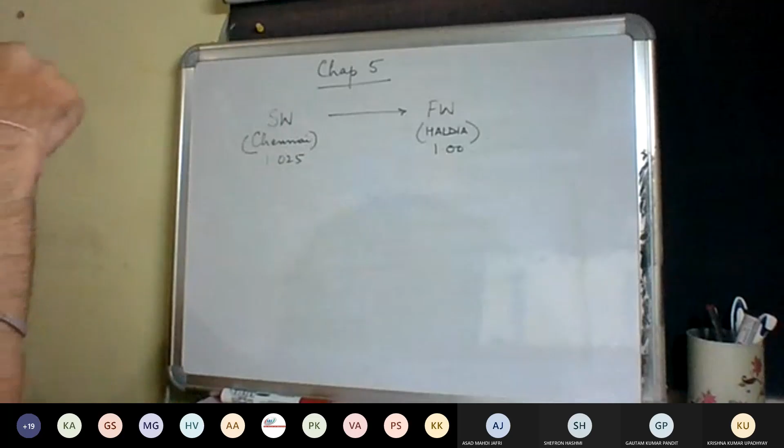So I am going from a higher density to a lower density. So what will happen to my hydrostatic draft? Anybody? So the draft will increase. Draft will increase, sir. So my draft will increase.

So I will have what is called as a mean sinkage. My draft will increase.

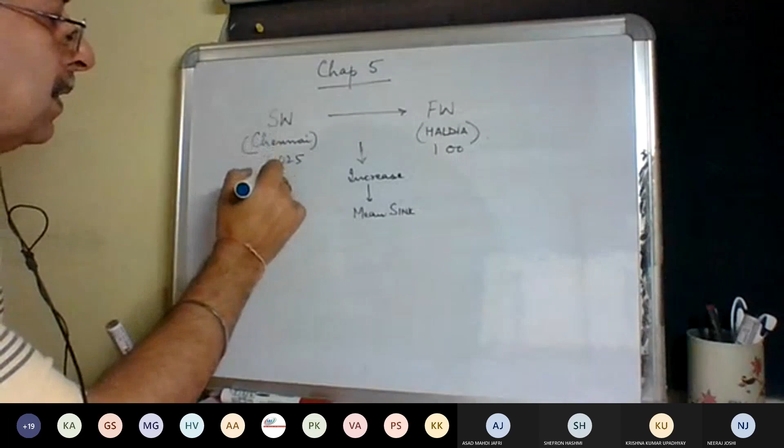Now, for the first part of it, supposing at Chennai, my vessel's displacement was 50,000 tons. And I pick up the ship and I put it at Haldia now. What will be my displacement here, at Haldia?

Displacement will remain the same. Does everybody agree to this statement? Yes sir, displacement remains constant. Displacement does not change. What changes is the underwater volume and therefore the draft. The displacement remains constant. Okay, the underwater volume will change. Draft will change. Displacement remains constant. Okay.

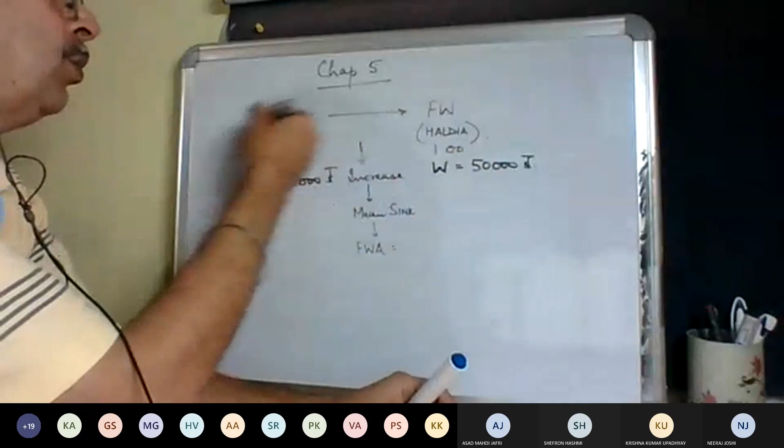Now, if I am moving from salt water to fresh water, the change in draft, this is called as freshwater allowance. The increase in draft is given by the term freshwater allowance. Similarly, when I go from freshwater to salt water, the decrease in draft is called as freshwater allowance.

And this freshwater allowance is given by a formula: W upon 40 TPC, where W is the displacement of the vessel, TPC is the tons per centimeter immersion. Let's check the units. W is in tons, TPC is tons per centimeter. Tons cancel, centimeter goes on top. So the units of freshwater allowance, when you use this formula, will be centimeters.

So freshwater allowance is this.

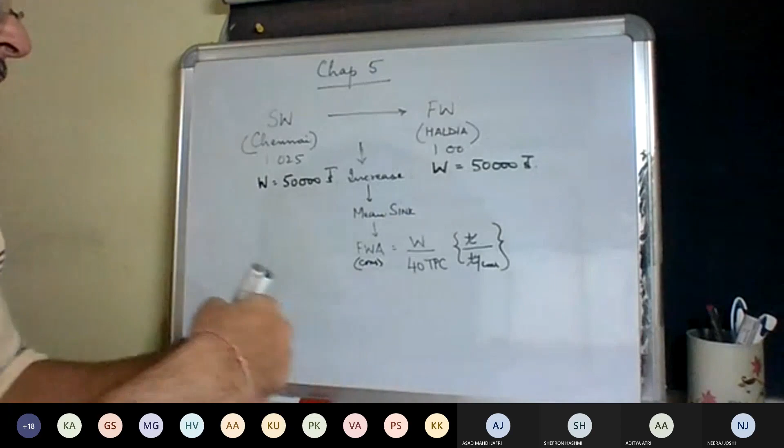Now there is something called as TPC. TPC changes with density.

So therefore, the TPC which will be used for calculating, and the freshwater allowance is also directly proportional to displacement. That means as my displacement keeps increasing, the freshwater allowance will also keep increasing along with the draft, because displacement will be proportional to the draft.

Proportional means it'll increase with the draft, not at the same rate. So that means if draft increases, freshwater allowance also increases. So therefore, the freshwater allowance usually given for a ship is at the summer draft.

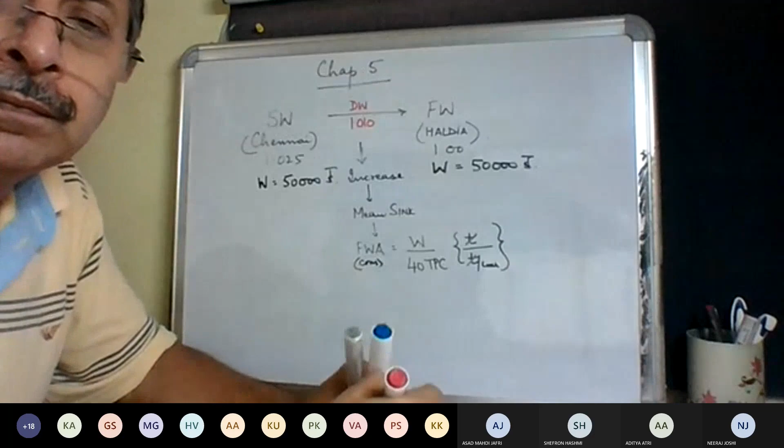Now there is something called as a density in between freshwater and saltwater. So supposing I am talking about a density 1010, that will be called as dock water. So dock water is a density in between saltwater and freshwater.

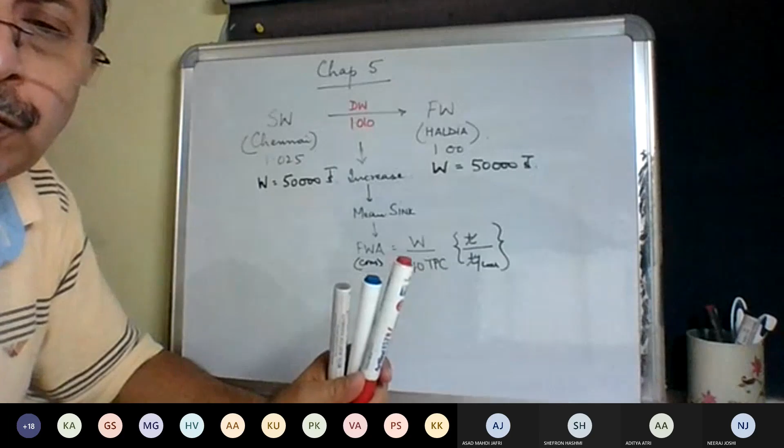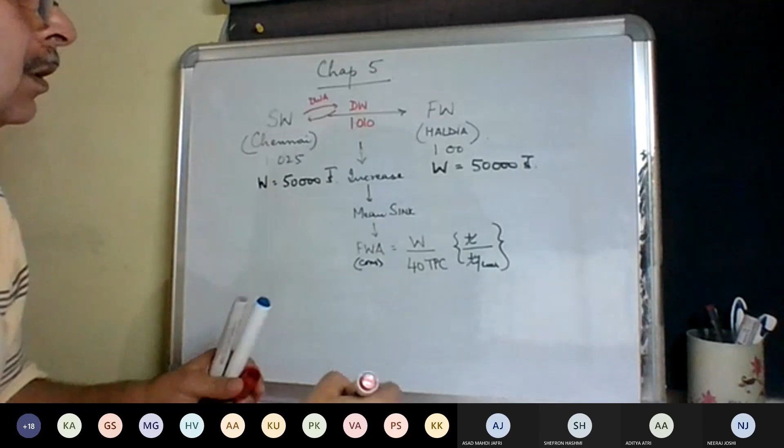So when the vessel goes from Chennai to dock water, then that will be called as dock water allowance. Similarly, reverse. And if the vessel goes from Chennai to Haldia, freshwater, then it is called as freshwater allowance.

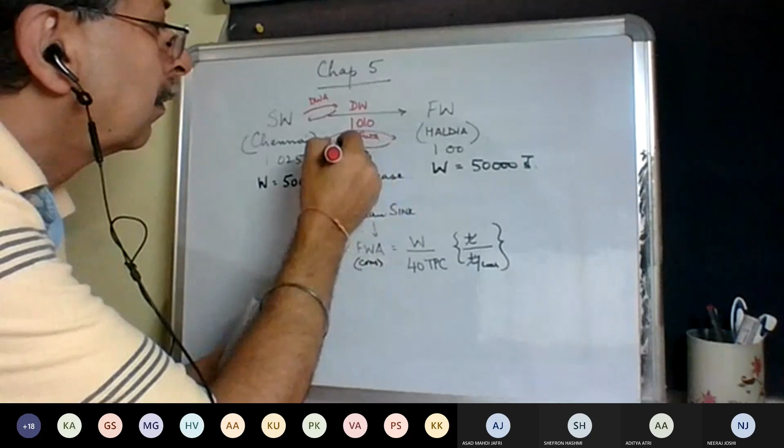The methodology will remain the same. That is, when I'm going from higher density to lower density, there will be an increase. And if I'm going from 1010 to 1025, there will be a decrease.

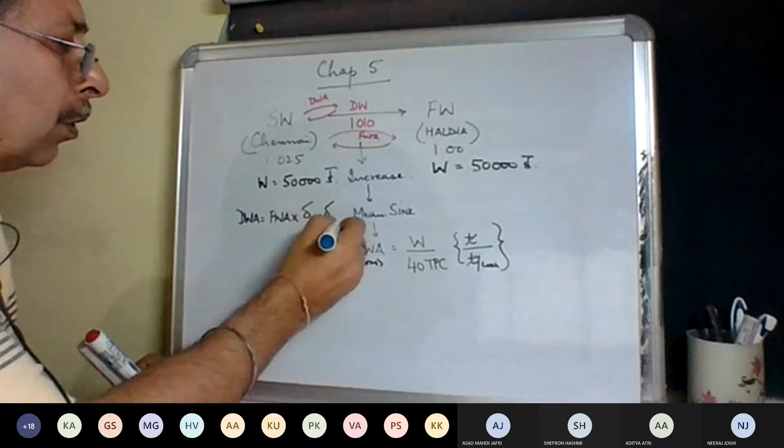The formula for dock water allowance is freshwater allowance into difference of the two densities upon 0.025. Freshwater allowance into difference of the two densities upon 0.025. This will give me dock water allowance.

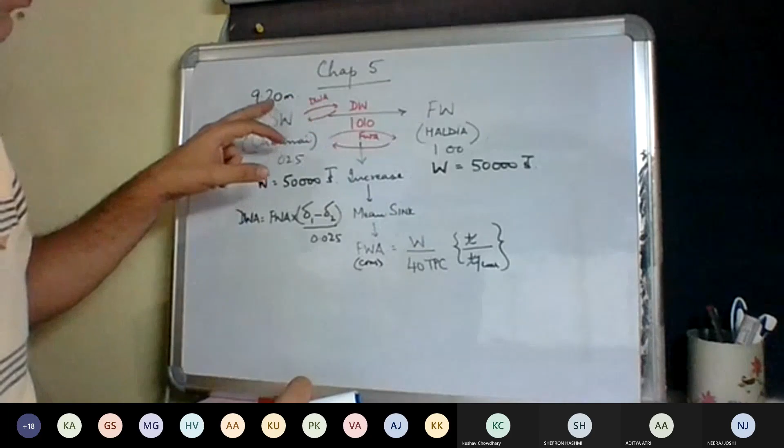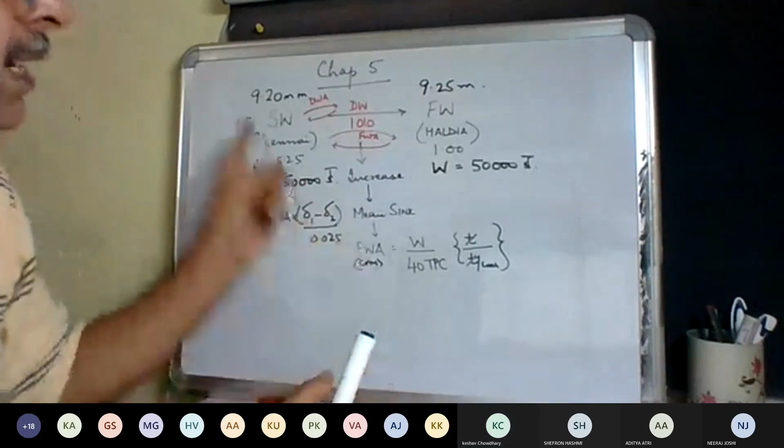Change in underwater volume. Change in underwater volume, and basically because of change of density it has happened. Yes, sir. So that difference of 5 centimeter is what is called as freshwater allowance or dockwater allowance, depending on what be the case.

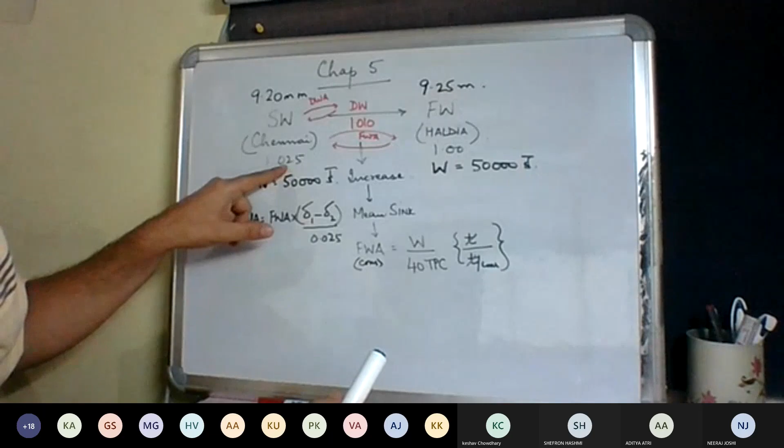Okay. Because buoyancy is decreasing. This was earlier providing me greater buoyancy, greater upward force at Chennai. But when I arrive at Haldia, density has decreased. So therefore, the buoyancy has decreased. If buoyancy has decreased, the vessel will sink because displacement is the constant.

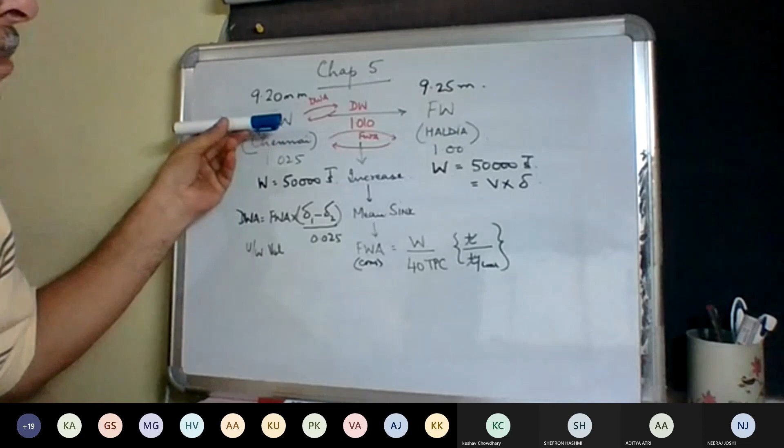Second is draft remains constant. So if my vessel is floating at 9.20 meter draft in salt water, I want to keep my draft the same 9.20 over here in freshwater also. How will that be possible?

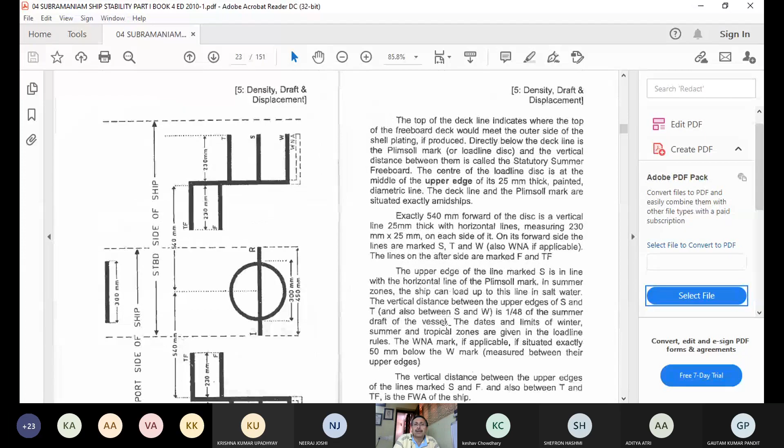All right, so therefore, let me show you the starboard side. So this is the starboard side one.

The deck line is 300 mm. The plimsoll mark, which is in line with the summer mark, is 25 mm thick. The OD is 300 mm diameter, and the length of the line is 450 mm. The center of the plimsoll mark to the center line of the starboard side load line vertical line, the distance is 540 mm.

Each of the lengths of the tropical fresh and the tropical are 230 mm in length. So it starts with tropical fresh, then you have fresh, then you have tropical, then you have summer, and then you have winter. And below the winter, you have winter North Atlantic, only specific for the length of the vessel and for the region where it is plying.

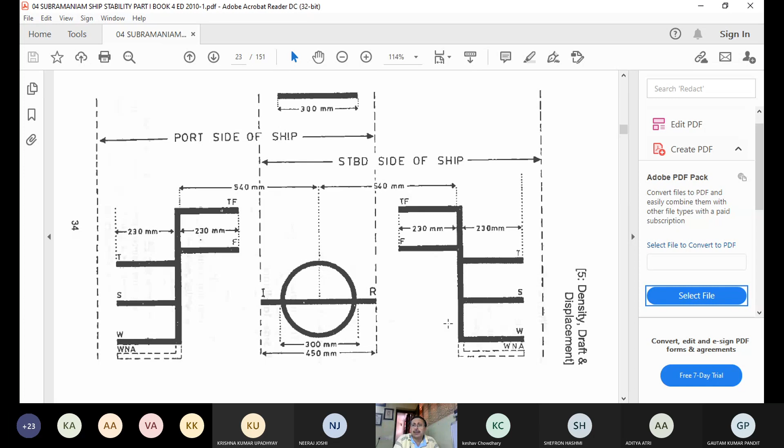Okay, these load lines are weather-wise. So the world has been divided into summer zone, tropical zone, tropical fresh, winter, and winter North Atlantic. This has been done for the safety of the vessels. So the vessel which is in a particular zone, that load line should not be submerged.

That means if I am in a summer zone, my summer zone mark should not be submerged. Similarly, if I'm sailing out in a tropical zone, then the tropical zone load line should not be submerged. At any point of time, no load line should be submerged. That is the important thing.

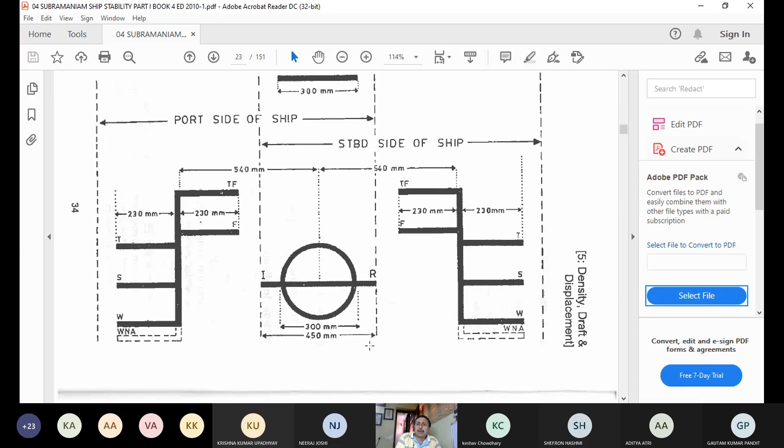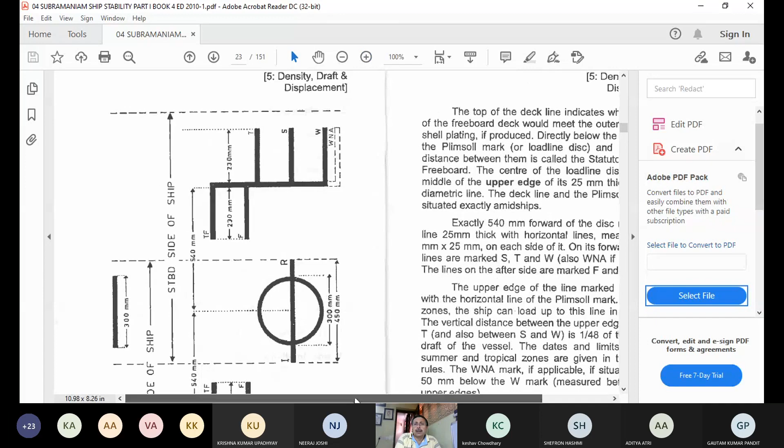The top of the line indicates where the top of the freeboard deck would meet the outer side of the shell plating.

Directly below the deck line is the plimsoll mark, also called the load line disc. The vertical distance between them is called the statutory summer freeboard. So the distance from the deck line to the summer mark is called the summer freeboard.

So the summer draft plus the summer freeboard will give me the total height from keel to the deck line. I repeat, summer freeboard plus the summer draft will give me the total depth from keel to deck line.

Is this clear so far? Yes, sir. Okay.

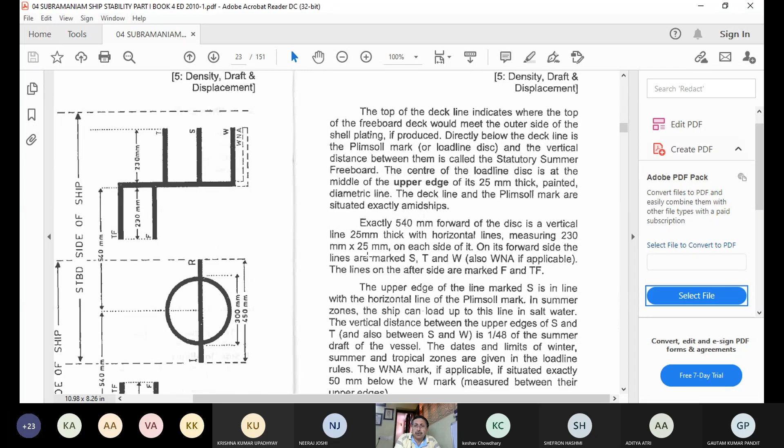The upper edge of the line marked S is in line with the horizontal line of the load line disc, also the plimsoll mark. In the summer zone, the ship can load up to this line in salt water.

The vertical distance between the upper edges of the summer and tropical, and between summer and winter, is 1/48th of the summer draft.

The dates and limits of the winter, summer and tropical zones are given in the load line rules. So the load line rules specify where winter is, where summer is, where tropical is.

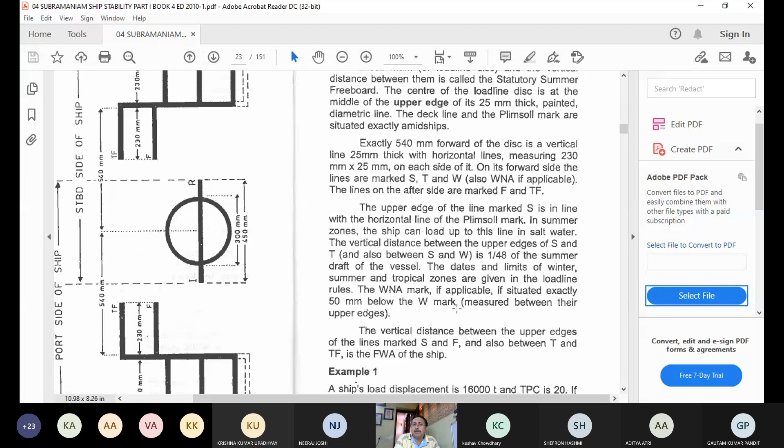The winter North Atlantic, if applicable, is situated 50 mm below the W mark, measured between their upper edges.

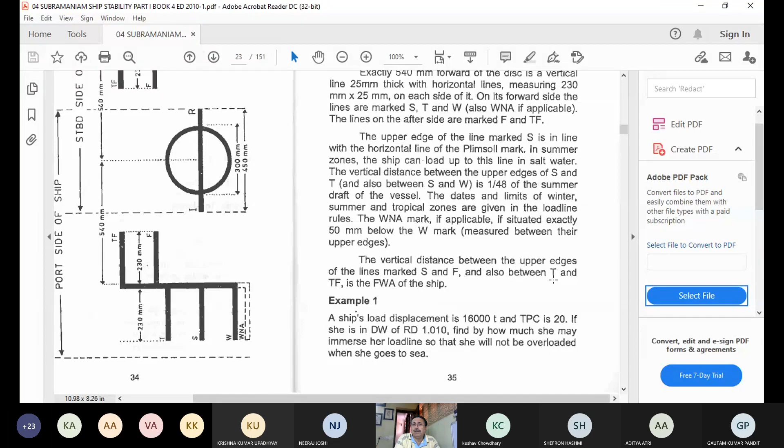The vertical distance between the upper edge of the lines marked S and F, and between T and TF, is also called the freshwater allowance.

Is this clear? Between summer and freshwater, and this 1/48th, what is this, sir? This is the distance, the vertical distance between S and T.

So this distance between S and T, top to top, this distance is 1/48th of the summer draft. Similarly, the distance between S and winter is also the same.

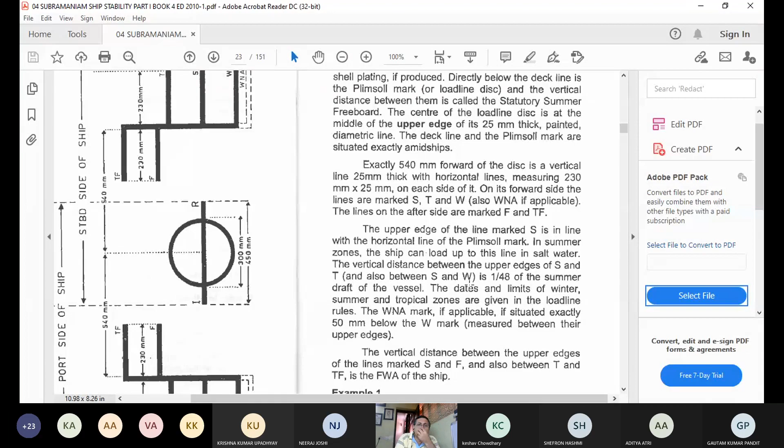The vertical distance between the summer and the tropical, and between the summer and the winter, is 1/48th of the summer draft.

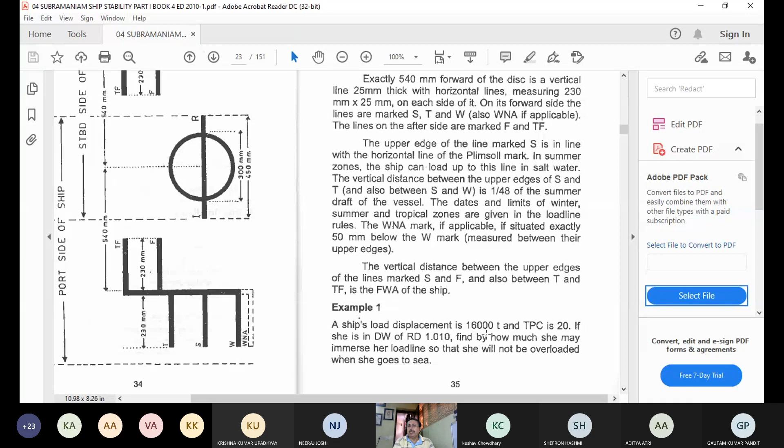Okay, so let us see example 1. A ship's load displacement is 16,000 tons and TPC is 20. If she is in dock water of RD 1.010, find by how much she may immerse her load line so that she will not be overloaded when she goes out to sea. Going out to sea means 1.025, and she should not be overloaded. Our load displacement is 16,000, TPC is 20.

So freshwater allowance basically is W upon 40 TPC. W is 16,000 tons, TPC is 20, so that means freshwater allowance is 20 centimeters. Dock water allowance is freshwater allowance into difference of the densities, 1025 minus 1010 upon 0.025. That means 12 centimeters.

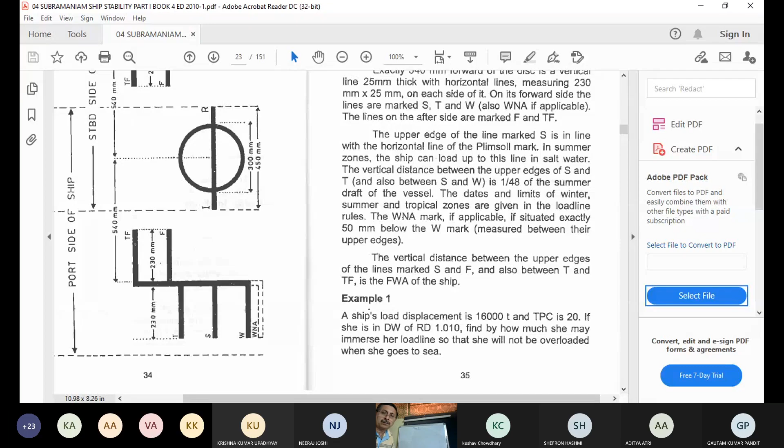Want me to repeat it? Yes, sir. Want me to repeat it? Yes, sir. Okay. Let me just unshare my screen first. Okay, can you see my board?

Yes, sir. All right. So my ship's displacement is 16,000 tons. My ship's TPC is 20. Right now the dock water density is 1010, and the ship is going from here to 1025.

Okay? So when she goes from 1010 to 1025, what will happen to her draft? Sir, it will decrease. So my draft will decrease, correct?

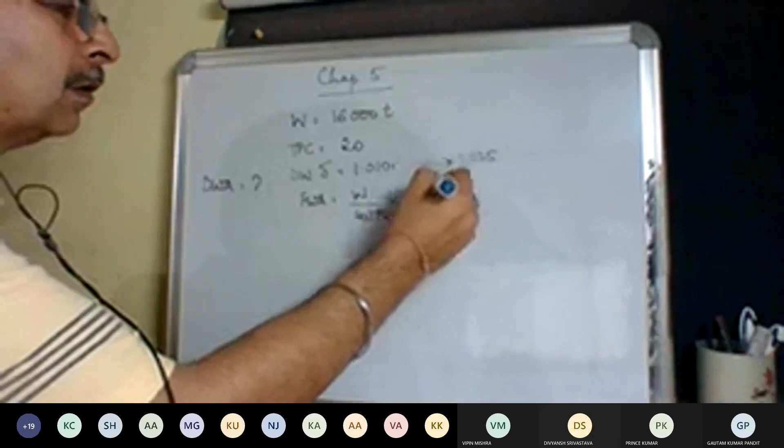So when I go from here to there, my mean draft is going to decrease by how much? That I have to find out - that is called dock water allowance. So first I calculate freshwater allowance, that is W upon 40 TPC. This is my load displacement. This will give me my freshwater allowance, that is equal to 20 centimeters.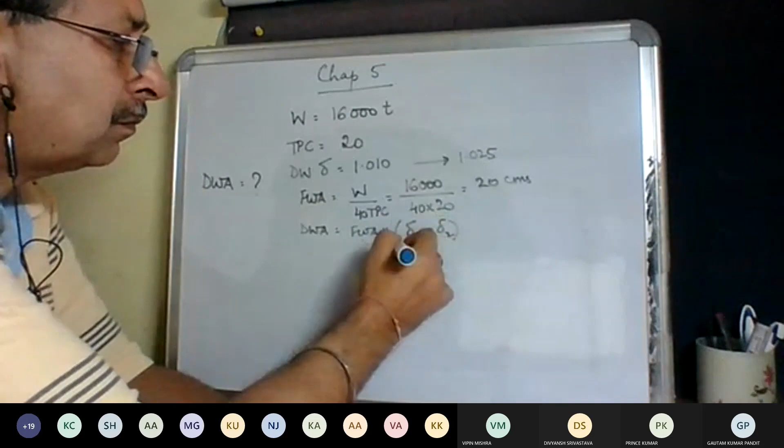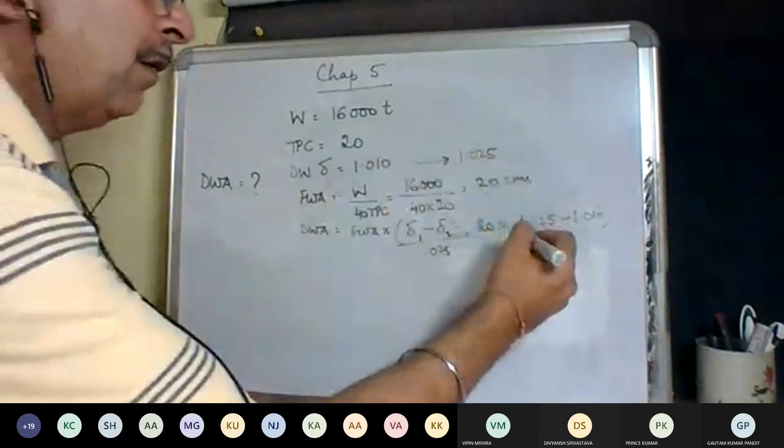Put it in the formula for dock water allowance: freshwater allowance into difference of the two densities, over 0.025. Basically freshwater allowance has a proportion, that is what it is. So 20 into 1.025 minus 1.010, upon 0.025.

So what does this mean? This means that the ship can immerse her salt water load line by 12 centimeters, yes or no? That means when I sail here...

Let me show it to you. Let me know when you can see. Yes, sir, all right. So basically this ship can immerse her summer line here by 12 centimeters. Understood or not? Yes.

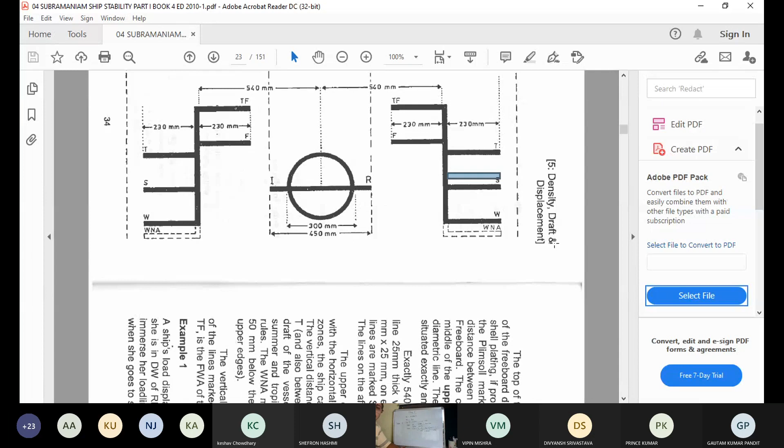Because dock water allowance is - see, summer is here, tropical is here, fresh is here. Your dock water density is somewhere in between fresh water and salt water, somewhere in the middle.

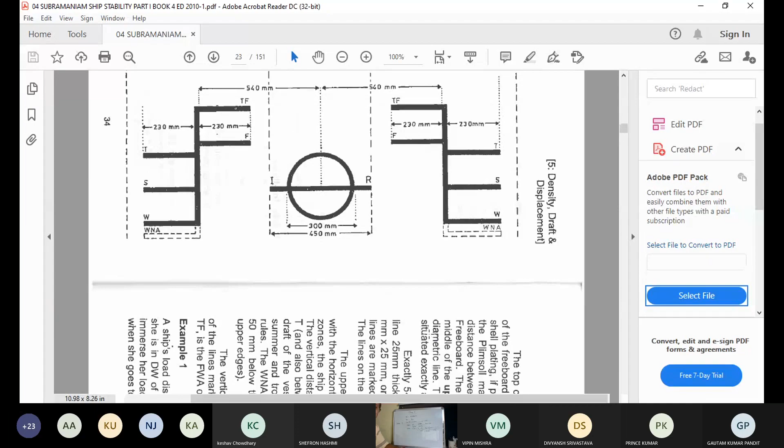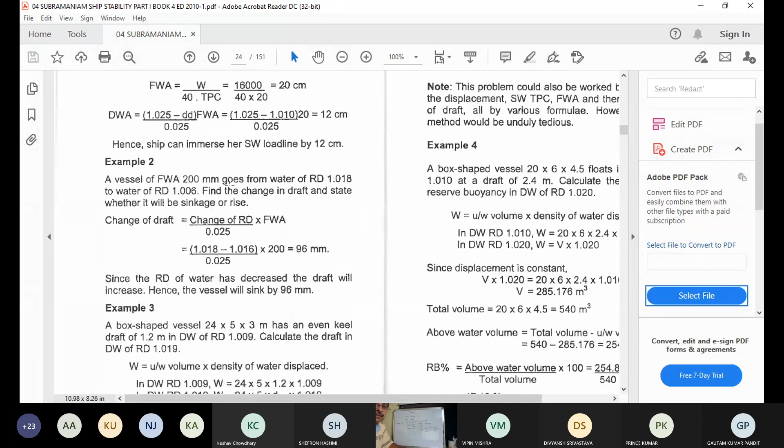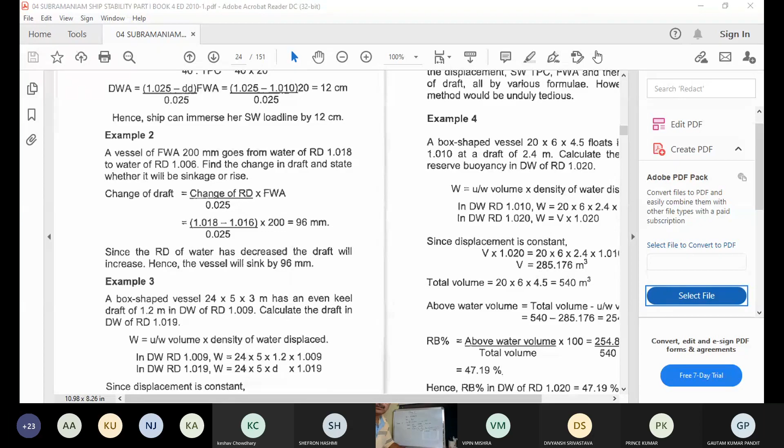That is the meaning of this. Is this understood? Example 1. Yes sir, okay. Now we are coming on to example 2.

Let me just unshare my screen first so that you can see my board. So, coming on to example 2: vessel of freshwater allowance 200 mm goes from 1018 to 1006. Find the change in draft and state whether it will sink or rise.

So first, the density is decreasing, so draft will increase - okay, so there will be an increase. So we are all agreeing to this, that the draft will increase.

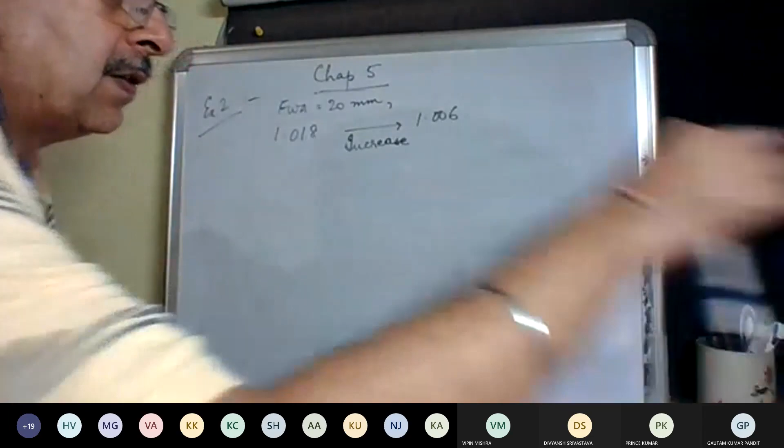Now how much will it increase? That's the question. So dock water allowance is freshwater allowance into difference of the two densities, that is 1018 minus 1006. So freshwater allowance... oh sorry, my mistake. Freshwater allowance is 200 mm.

And she's going from 1018 to 1006 or 1016, I don't know. 1006, shayad, 6. So 1018 minus 1006, that is 0.012 divided by 0.025.

It's a ratio of the 200 basically. So that will come as 96 mm. That is 9.6 centimeters.

So therefore, the vessel will sink because it will increase by 9.6 centimeters. So if I'm sailing out from 1018, I need to take care of this amount so that when I arrive at 1006, I will be at my whatever draft that I want. So supposing this is my summer draft, over here I'll be summer minus 9.6.

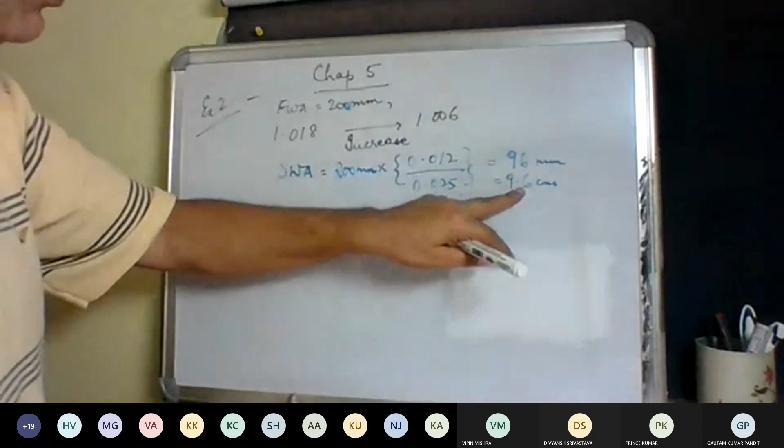So basically my dock water allowance is 9.6 centimeters. I will increase by that much. I will sink by that much.

Example 3. Box shaped vessel, 24 by 5 by 3. This is a box shaped vessel. She has got an even keel draft of 1.2 meters. Draft, even keel, 1.2 meters. And this is in dock water, density 1009.

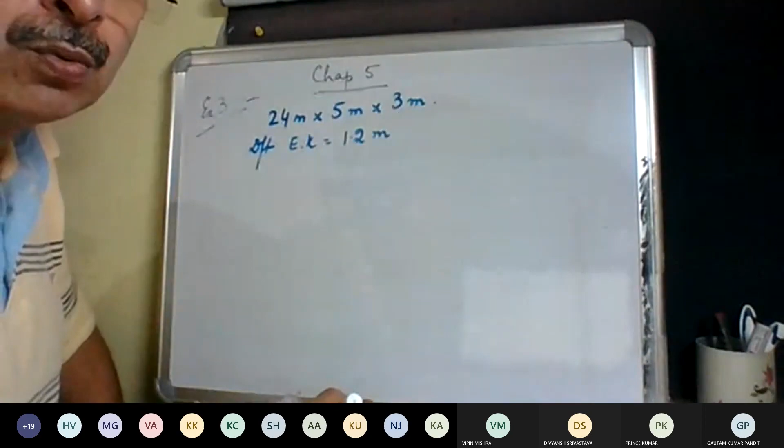In 1009, I have to calculate the draft in dock water 1019. So from 9 she is going to 19. So firstly, I will calculate displacement in 1009. 1009 displacement will be volume, underwater volume 24 into 5 into 1.2 into 1009.

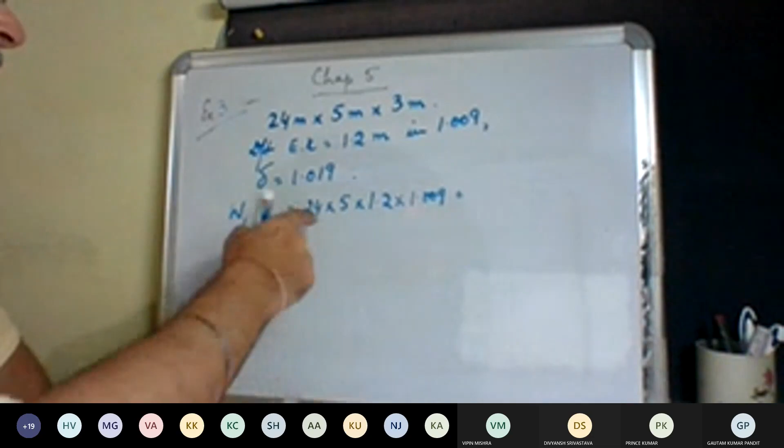This is my displacement in 1009. And I have to find out my displacement in 1019 and I have to calculate the draft. My displacement will remain the same. So 24 into 5 into draft in 1019.

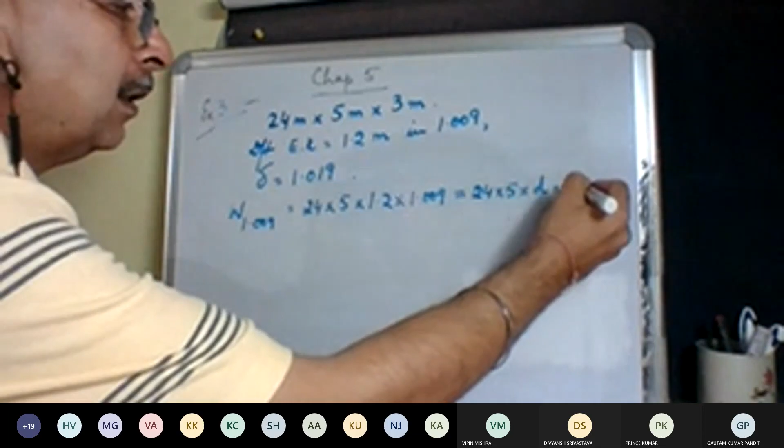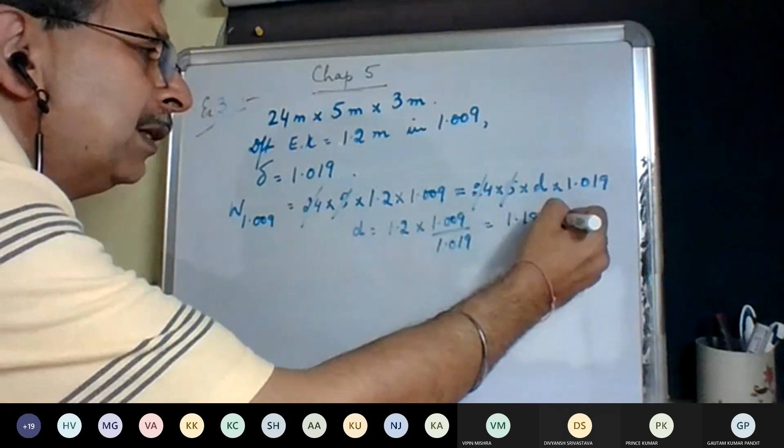24, 5, 24, 5. The draft will be 1.2 into 1009 upon 1019. So draft will be 1.188 meters. When I go from less density to more density, my draft will decrease. This will be my new draft.

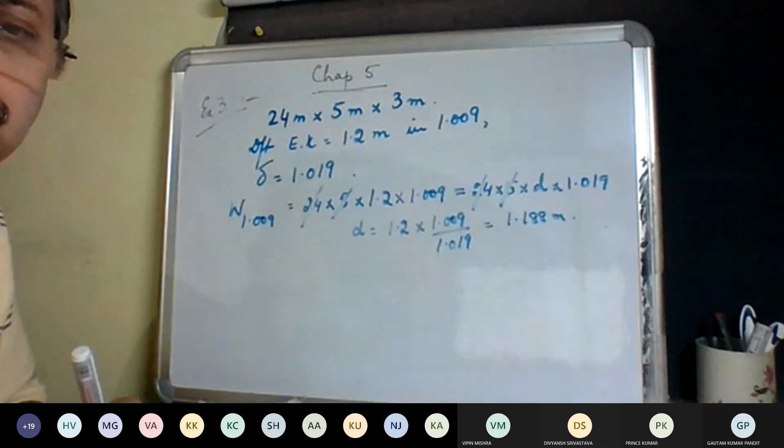Is this okay with everybody? Yes, sir. All right.